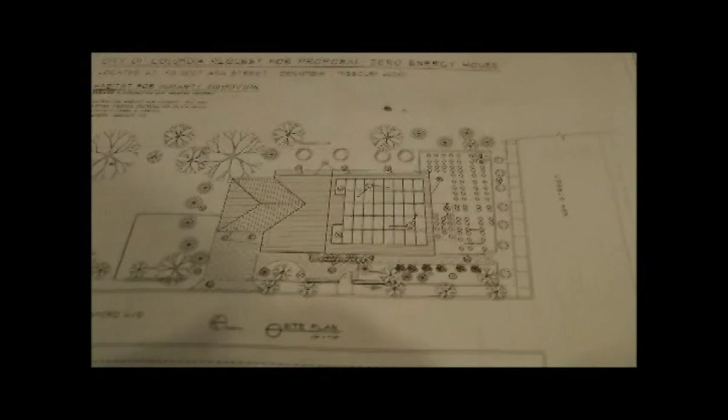There's a site plan, you see the panels up on the roof. We see them here on the model as well. That supplies the electrical power, and then we have two panels for the water. So the domestic hot water is also heated by the panels.

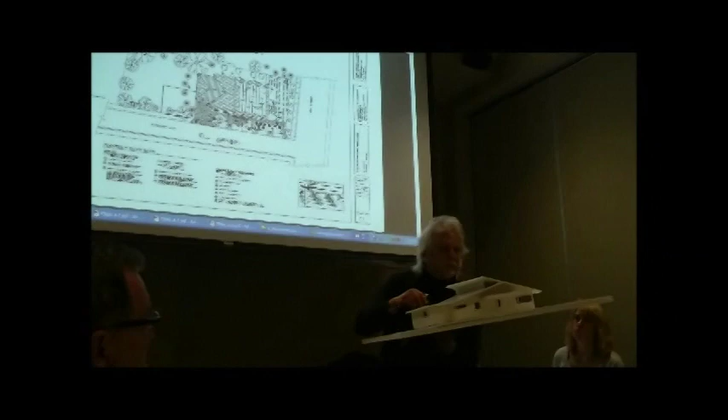Then in the front we do a trombe wall here. We want to call this the catalog house, because we want people to come here and see what's possible to do on their house, what they can do on their project, and what's going on with solar. We're trying to address global warming, really, and this is a perfect opportunity to do that.

So then, as we bring in light from the north on this side, we have the panels on this side. We enter from the Sanford side, on this side of the street, as you can see here, and the garage is in the back. You come in through the kitchen.

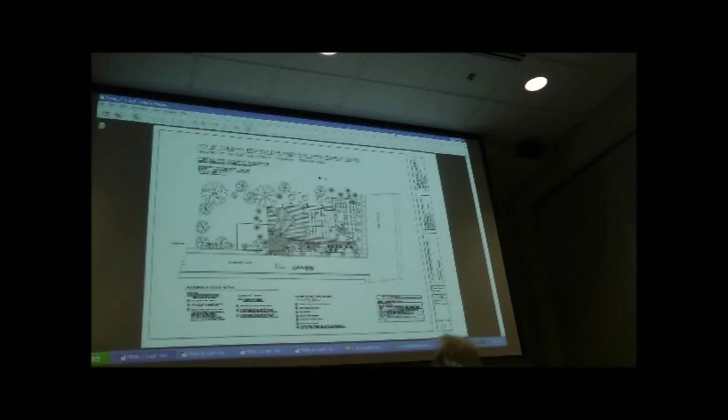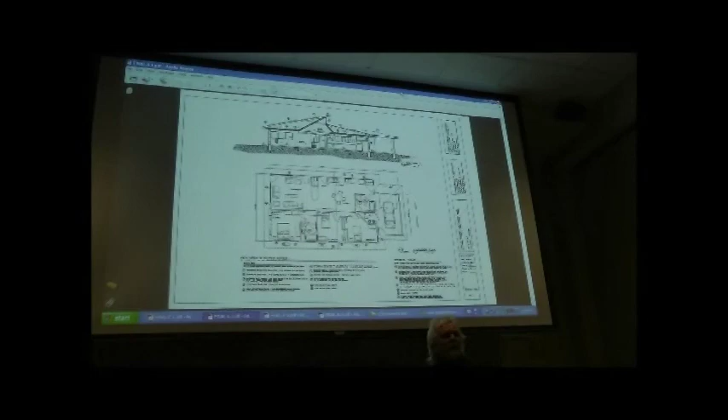Go to the next one, Bill, will you? The idea behind the architecture is to create a sense of space, cutting out windows in the corner up here, and then over here, back in the kitchen and the bedroom. So the house is small, it has to be small, it's 1,200 square feet as the other one was. But how do we make it feel larger?

That's the question. We want to stop things like domestic violence and people feeling depressed. We can give them air and light. Above, you see there's a clerestory facing north, with panels on the south.

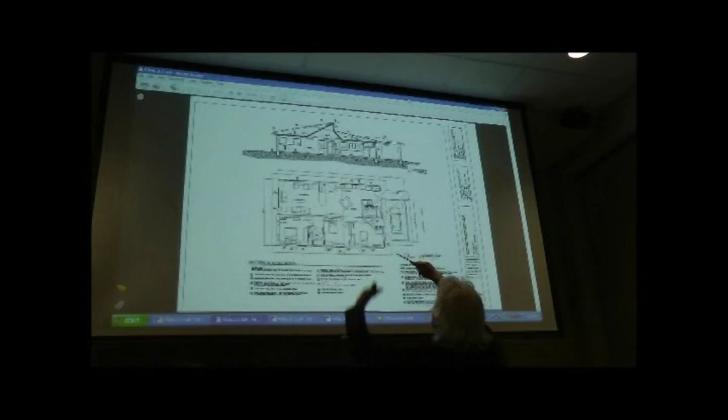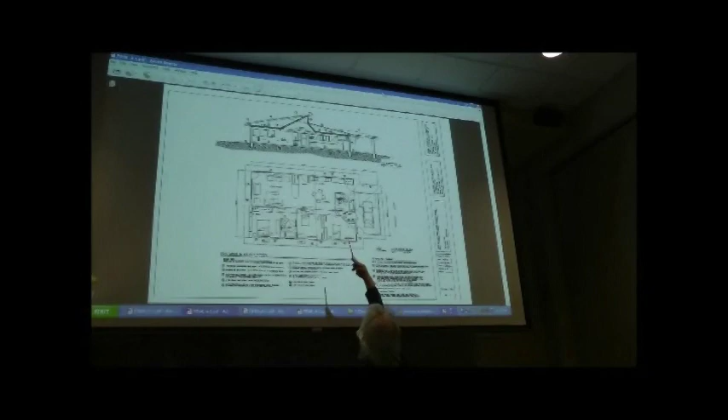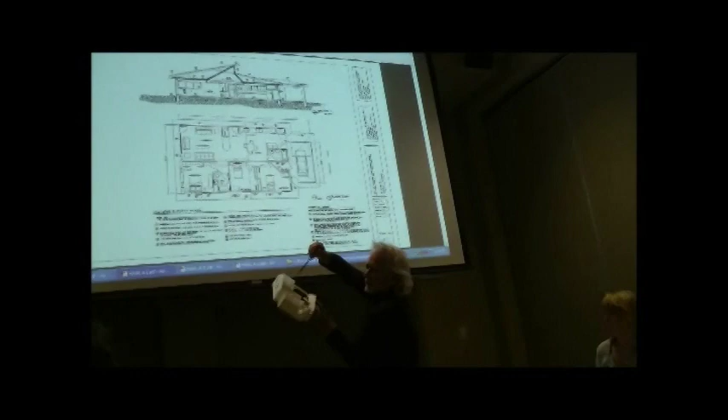And then we bring the light into the center of the building, run it all the way through, and then it comes through to the center, and we work it into the interior of the space with the light coming through here. Then there's soffitting going around above the closets there, runs around, comes back, and turns, and then it's a flat ceiling above in the kitchen and this part of the living room, right through here, the kitchen here, with the light coming down through the center. Here it diffuses into the bathroom, which is universal design.

We have one bathroom with universal design. The other, the children's room, is normal design. The square footage was so tight.

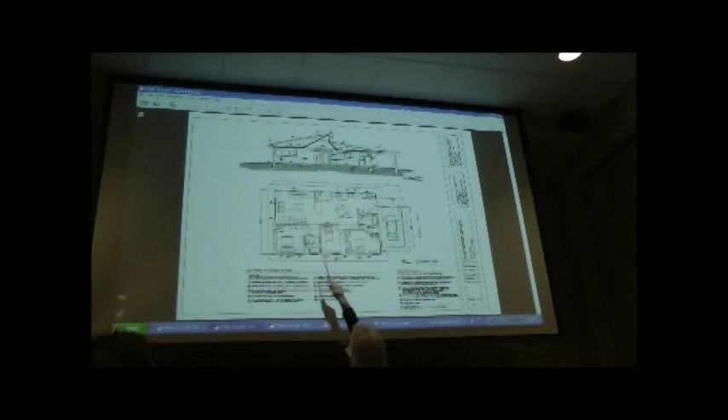Again, like the other design, we eliminated the hallways, but we did make little entry niches for the entrance into the private areas. With the soffit there, that niche has a little 7-foot-high entrance into the room, so you feel like you've passed into the space. It's about the psychology of space that we're working with here.

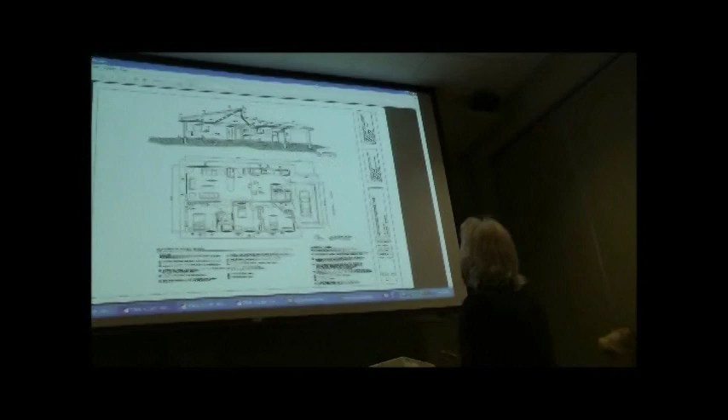And then we have these units. Now, Larry, I want you to take it into the system and explain these split system units.

One of the things I looked at was an energy model for the building, trying to figure out how we can make a low energy building at low cost. I looked at geothermal heat pumps, and I looked at a mini split heat pump. Mini split heat pumps are almost as efficient, but they are much lower cost.

So we decided to maximize the amount of solar roof that we've got, south-facing roof, and reduce cost on some of the other things, maximizing the solar energy input into the house, which reduces the utility bills as much as possible for the homeowner. Because we're figuring this is a low-income homeowner, they don't have lots of money to spend on the utility bill.

We're going to try to get it so that, well, I project a HERS rating of 0, which means year-round it's producing as much energy as it consumes. The mini split heat pumps, I think, are an idea that can be used on other types of low-income housing.

Habitat, of course, has built -- Bill knows how many -- 118. So they've built much more low-income housing than anybody around here.

So the idea of building this house is trying to look for cost compromises that don't affect the energy use that much, but allow us to build a real cost-conscious house. I actually looked at each of the energy items and made a cut: if it doesn't reduce the HERS rating by at least 1 or 2, we don't need that -- we're going to use a more cost-effective item. That's where we came up with the mini split heat pumps.

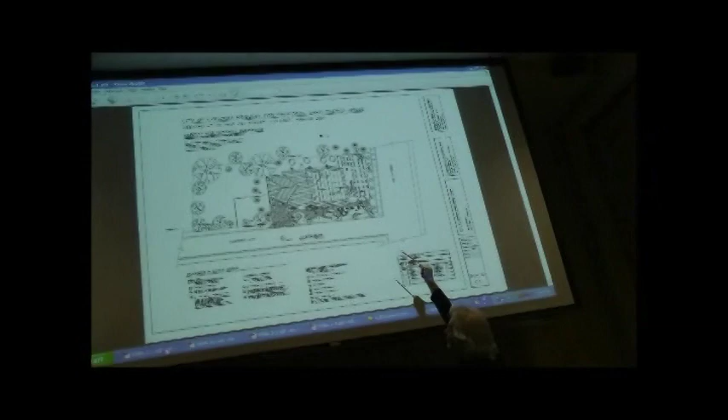I just want to address the trees one more time. There's a tree in the center of the lot, a small scrubby one we're planning to take out. The larger one is right above my pencil there, an old and mature one that could probably fall over in a storm, but again we'd have to check with the city. Up here is the problem.

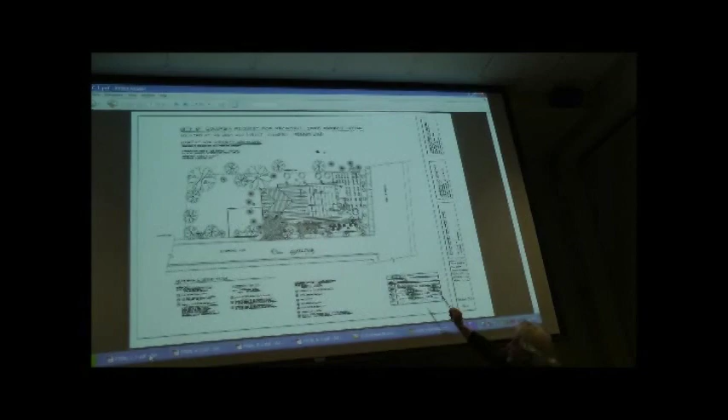On the east end, we have more and larger trees, and they shade us until about 11 o'clock. Then we get the sun around this way. In the morning we'd be cut off slightly, but in the wintertime we'd get more sun, although there is an evergreen there that's green year-round.

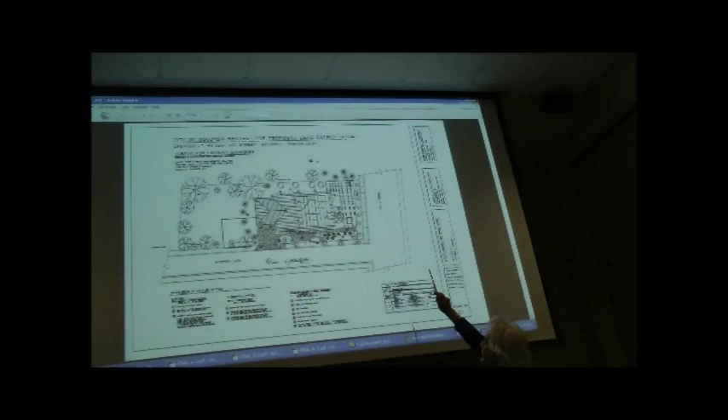So we're hoping we could negotiate a way to re-landscape their trees with smaller trees, and the same here where we take a few down. But the majority of the trees really start more in this back area, that's where the big trees are, except for... if we can't take out any neighbors' trees, it's fine. We've still got a pretty good solar site.

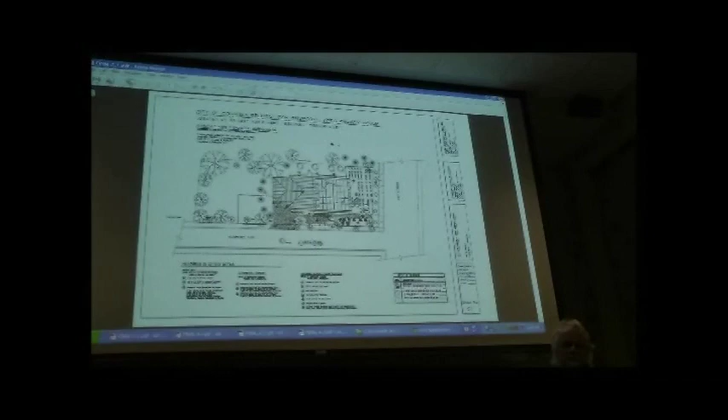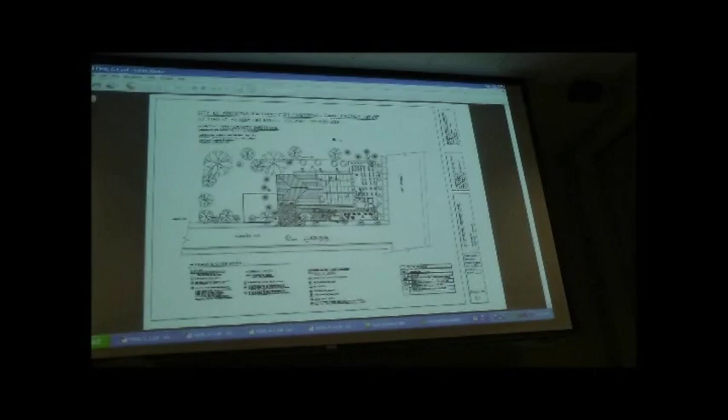We've got some contingencies in there for that. We've also got the solar package for the hot water, which is not in our bid, by the way - just the solar array panels are in our bid, the hot water's not. If Water and Light funds those, the company we're going to get those from has assured me he's got somebody certified to cut down those trees at a very negotiated price. So we've considered that.

Bill, how much funding is Water and Light putting into this project? As of today, zero. We have on our proposal what we've asked them to fund and what they said they'd like to fund. But there's nothing in our base bid contingent on Water and Light doing anything, so we can meet the HERS rating whether Water and Light funds a nickel of it. The only thing we won't have that you might think we have is the solar hot water - those solar panels are just to generate electricity, nothing to do with the water. If Water and Light funds the water, we'll put that in our project.

One of the issues of the structure here - you're eliminating the wood frame and the roofing, and yes, we do have storms here. What's the issue around the safety and ability of that roof style to withstand windstorms? Real good question.

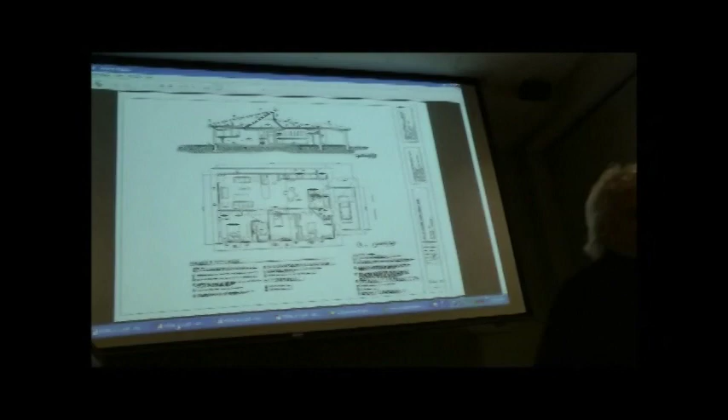We're using - go to number A1, if you would, Bill. Yeah, this one. Daniel, before we start, just remember that Water and Light is also going to fund metal roofing possibly, but that's not in our base bid, just to make that clear.

I'm not so concerned with the roofing, I'm talking about the support of the roofing - the style, where there's opportunities for wind to get into this structure, or the heavy snow like we had this year.

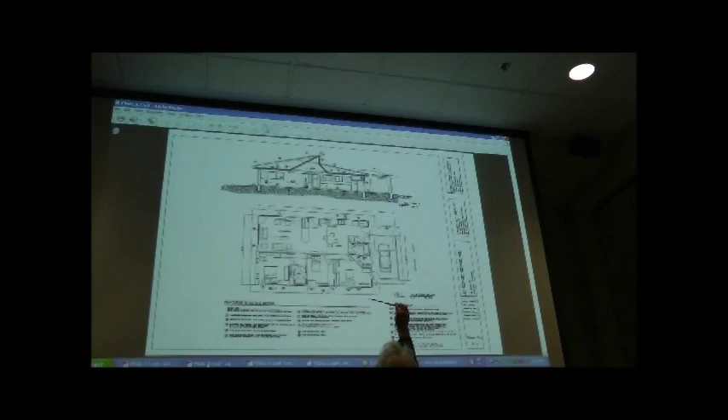All right, let me point this out to you. If you look at the top drawing there, it's called a section, cut through the building - right through here, and we're cutting through trusses. You see the slope of the rear roof extends into this other way.

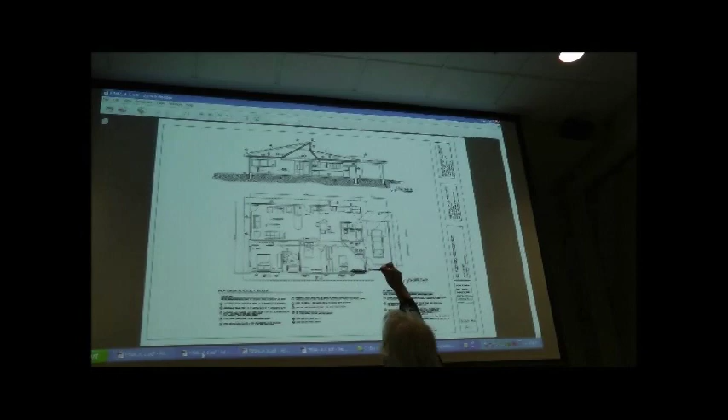There may be some supports that come in through the middle - I didn't draw in the pre-designed, but that's a truss, so it will have members in it like trusses do. It's pre-engineered, their configuration I don't know, but I do know I've got to bring that through, and these will be laid in as trusses when they come to the site, as normal construction.

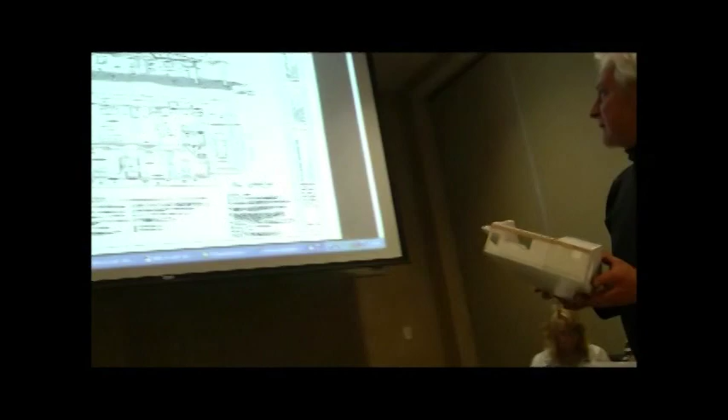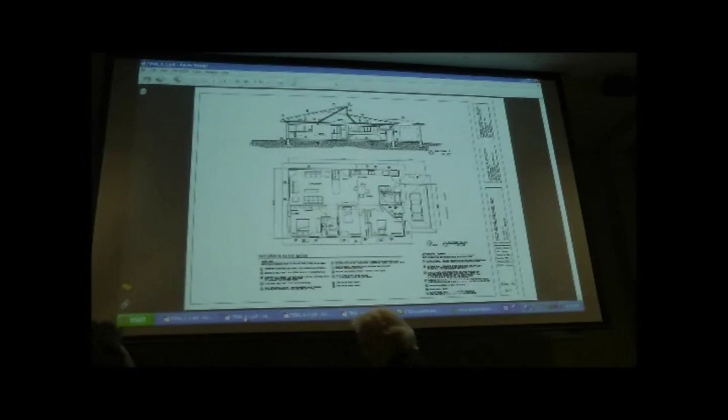There is one thing the design does have that I think will beef it up more than other houses - these beams, the trusses will be carried at the center point, you see those two beams on either end. They run through the house. So any wind from this side pushing on the building, with the racking strength of the walls, will alleviate any problem with structural issues.

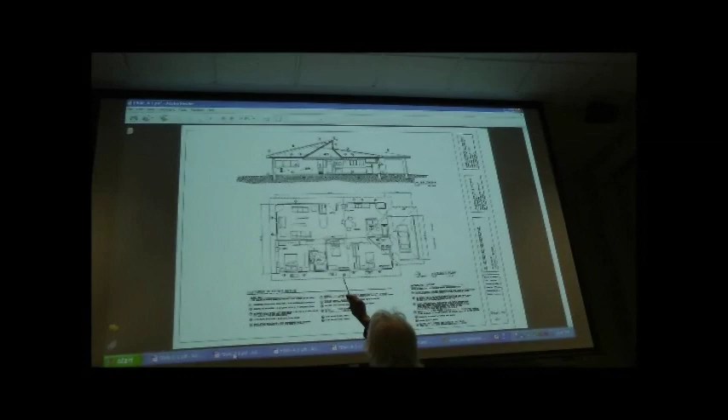The span of this thing - we've got 48 feet for a truss, they usually go 60 and onward for the span. I can clear span that, but I'm tying it in with the architecture, and I can play with the sizes. I'm going to do a pre-engineered truss, but put them at maybe 4 foot on center, and put more cross pieces this way. There's two ways to skin a cat on a structure - either you put it this way, or add more this way, and so forth.

But I want to run this exposed. Part of the idea behind the architecture is to expose the structure - this is when the architecture really starts to express itself.

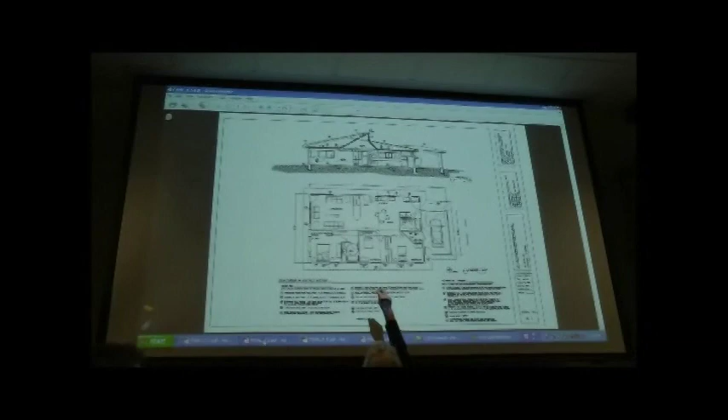So going across this area here, we would have some exposed wood pieces running through the space, with the light cascading through them, creating shadow and light.

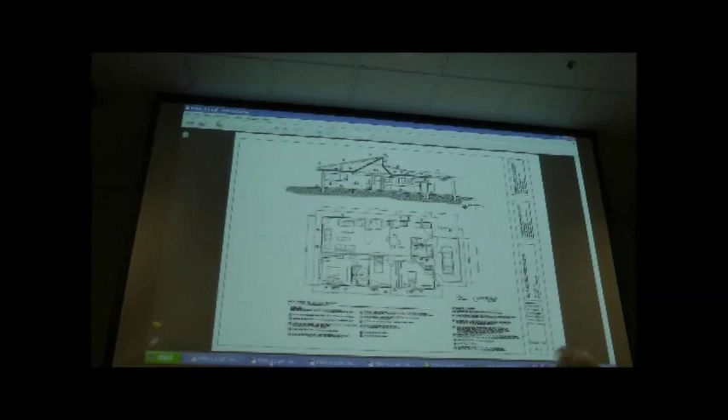The house still has to meet all the uniform building codes, of course, design requirements. There's no violation there, just a different, unique design. In terms of engineering, it still has to meet all of the same wind loads and structural loads - that's the advantage of pre-engineered trusses. You've got a structural expert on board that designs trusses every day, used to the wind loads, snow loads, and codes we have in this area. That structural expert is sort of sitting in the back seat - we don't see him here today. But the span of 48 feet is nothing for a truss. So anyway, I hope that answers your question.

So with the solar, do you have to have a battery supply, or is this? No, you run it back into the grid. It's passive - the old way of doing solar was to use batteries. The way we're doing it in the 21st century eliminates the batteries.

We're using what we call microinverters - a little module that's bolted onto the back of the solar panel, right on the roof. What comes out of that is 240 volts AC, hooks right into your electrical panel. There's no central inverter, no batteries, it's all on the roof. So it's a very reliable system. I've got some on my house - they're quite robust and very inexpensive these days.

And the net metering feature, with the utilities, feeds the energy it creates into the utility - so the surplus goes back on the grid, and at night when you're drawing power, it essentially uses the grid as a battery. In the daytime you're putting it on the grid, and at nighttime you're using it from the grid. Best battery around - 100% efficient.

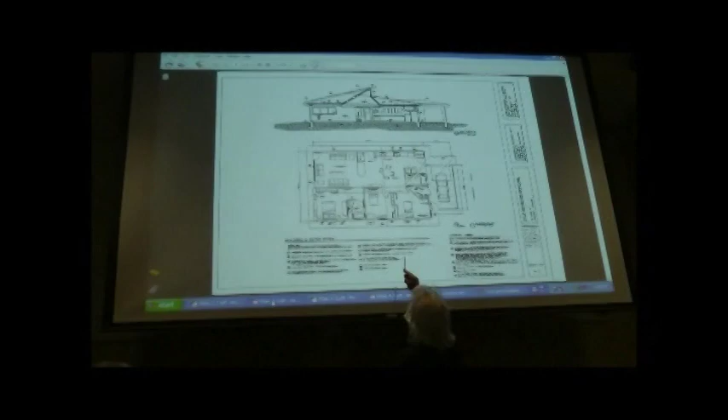Interesting thing is the entry to the mechanical room is only from the outside - from the garage. It's protected, and the panel, everything. Then we run the mechanical all down that soffitting through there - plumbing, electrical, the solar coming down through there. Let's go back to C1, Bill?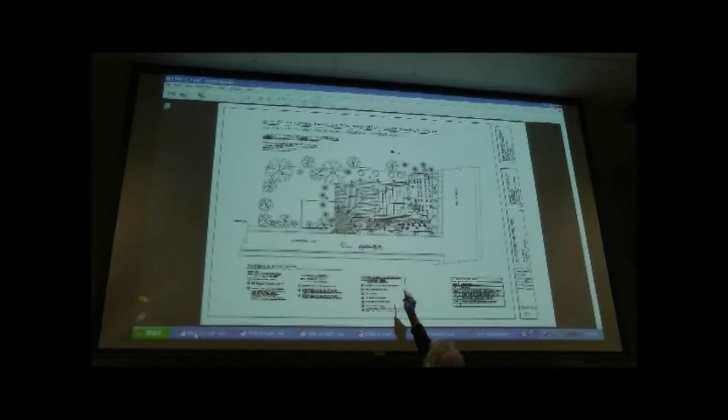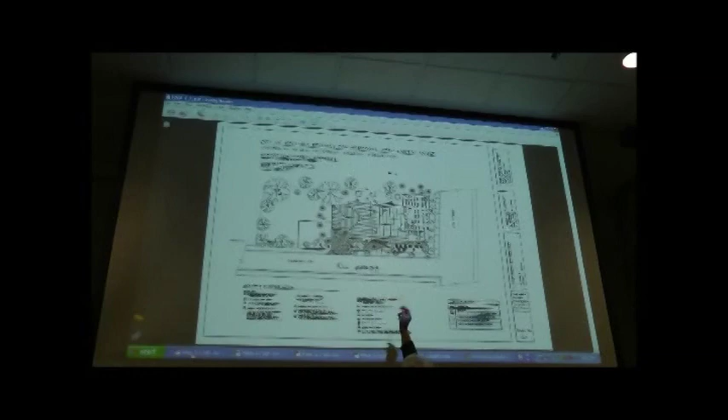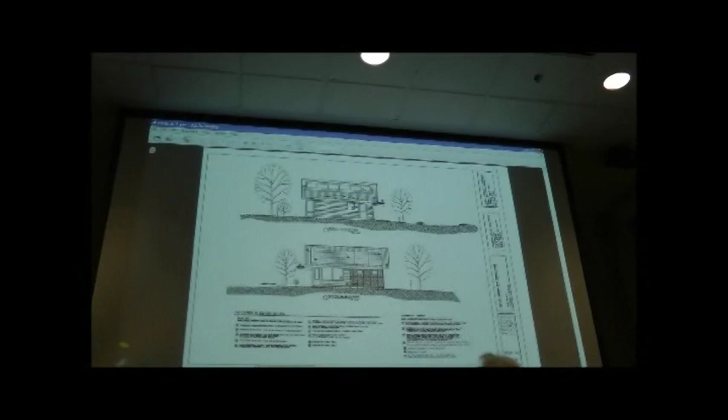If we get in our plan - we state that if we get from the power and light - those two panels on the top, the larger panels, are water panels to heat our domestic hot water. That would also run down through this central area, it'd all be collected to this one right here. Okay, and then it would come down to the central core and line up with this.

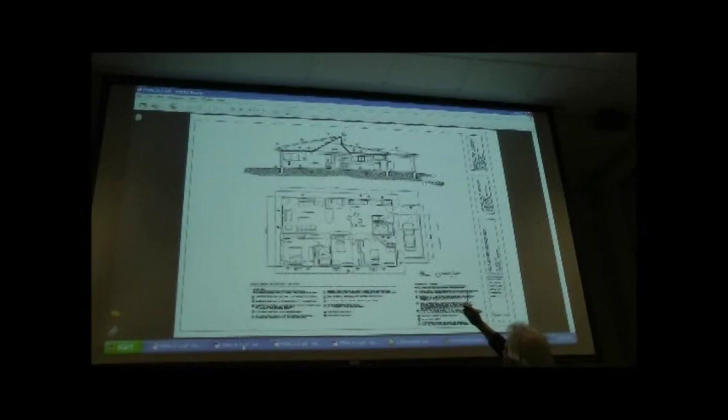Very modern design for a house of this type, in terms of the technology and the expression of the technology, and minimizing - did you explain the split system to him already, Larry? Our furnace - we don't have a furnace, there's no furnace room in here. There's some condensing units outside like a conventional air conditioner.

Then on the inside, the mini split air conditioner has a unit about as big as two bread baskets, sits on the wall. You have one in every bedroom and one in the living room, and that's all you need for heating and cooling the house. Is that ground source as well? No, it's not ground source - that's the key. It's much less expensive than a ground source heat pump, but almost as efficient - it's the most cost efficient heat pump there is.

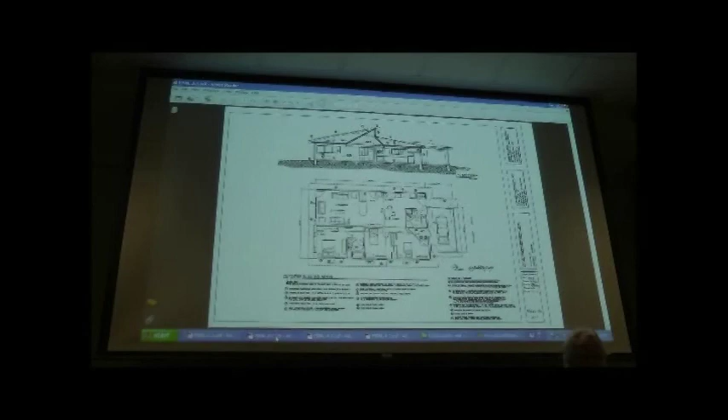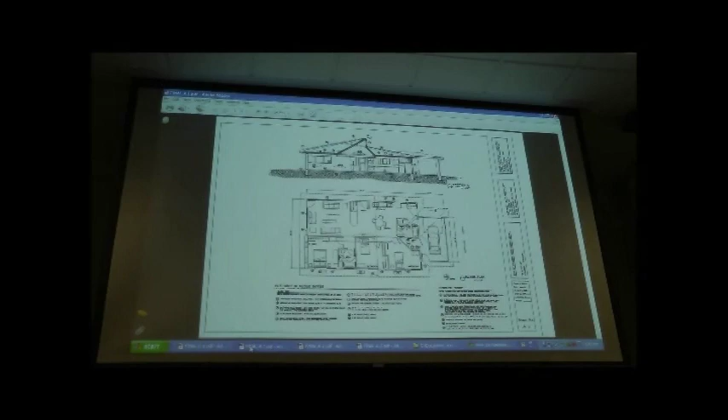Is the single car garage oversized - you heard our previous discussion in terms of single, double - is it sized sufficiently to allow, for example, a wheelchair accessible van to pull in there and extend out? Is it the garage you're talking about? Yeah, the garage is...